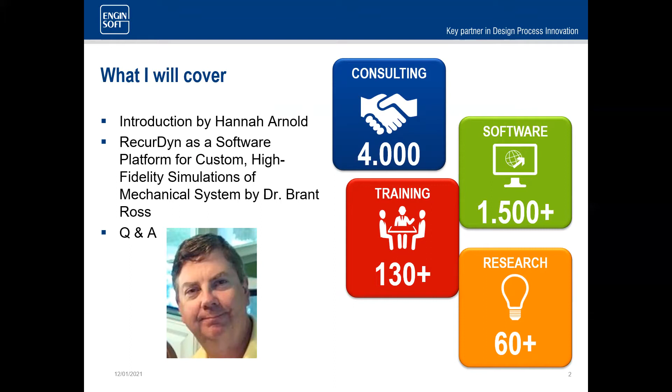So today we're going to go through our introduction, and then we'll turn it over to Dr. Ross to discuss RecurDyn as a software platform for custom high-fidelity simulations of mechanical systems. Feel free to ask questions throughout the presentation, but we'll have a Q&A at the end for dedicated discussions.

So a little bit about EnginSoft USA. We're a multinational company founded in 1983 by a group of engineers passionate in powerful advanced CAE technologies. Today EnginSoft is formed of a group of over 350 experts in new technology and leaders in virtual prototyping and optimization. EnginSoft provides customized solutions and leading innovative technology to support clients in complex innovations.

There are 7 locations around here. We also need to add our location out in Utah. We have Sweden, England, Germany, Turkey, France, home office in Italy, as well as our 2 locations here in the US.

Some of our customers by vertical are automotive, aerospace and defense, energy and construction, industrial, appliances, retail and consumer, as well as metallurgy.

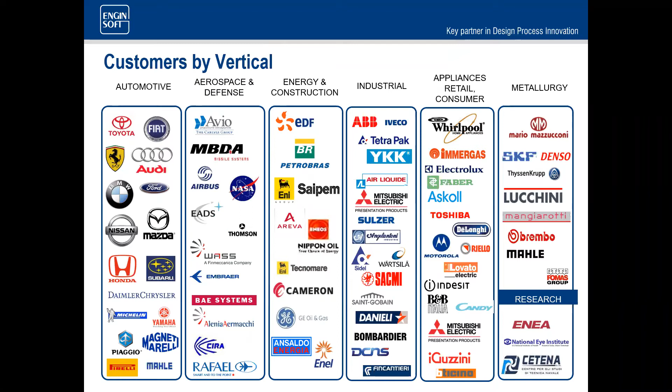Some of our distinguishing characteristics: we've performed over 4,000 consulting projects with various different companies and entities. We have over 1,500 different users on the software platforms that we provide and support. We typically do over 130 different training sessions yearly. We have changed how we do some of those due to the COVID situation, a lot of them moving from actual events over to web-based platforms. We've also performed over 60 different research projects with academia and government entities.

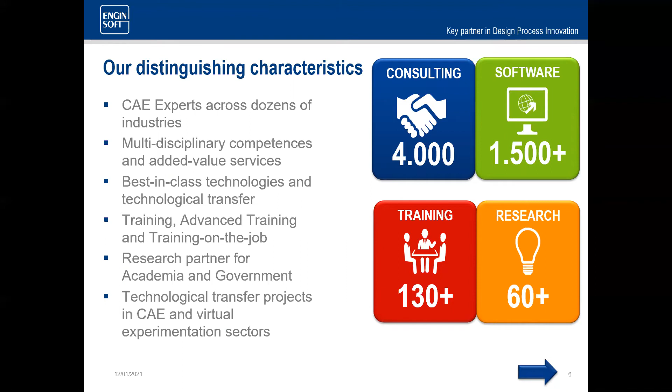And some of our skills are fluid dynamics, fatigue and durability, crash and fast dynamics, process simulation, high performance computing, mechanics, tolerance analysis, environmental and vibroacoustics, multi-body, and optimization.

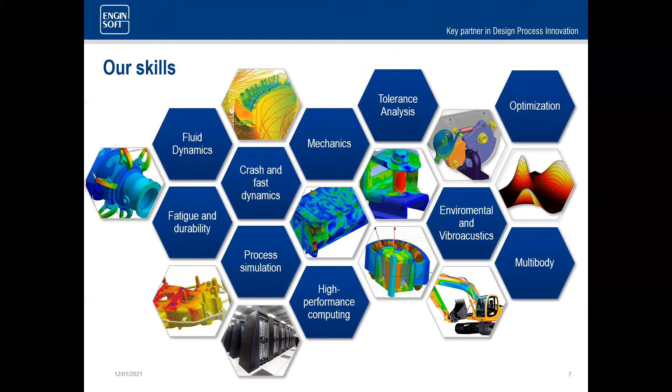So today we're going to talk about this topic of high fidelity simulations of mechanical systems, and especially we're going to talk about how we are able to accomplish these high fidelity simulations, and how we make them available to the non-expert user. This is really a special topic, and as far as the case study we have, this sort of work is, I think, rarely shared, because people who do the work to come up with a special simulation system tend to keep it private, as there tends to be proprietary information, and it also becomes a very strategic tool. But in this case, we have some work that we did under a government research grant, so we have this very rare opportunity to be able to share some of the details of that with you.

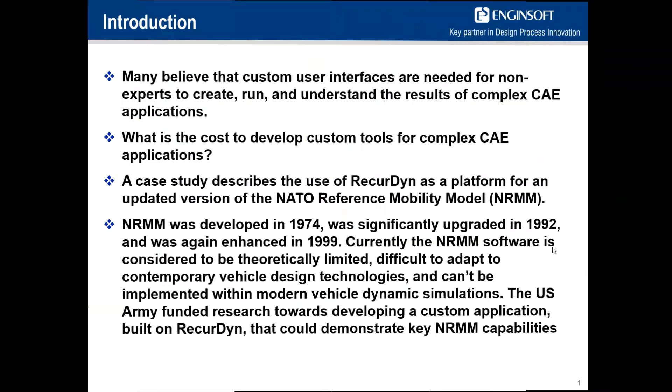So by way of introduction, let's talk about what the problem is we're trying to address. As you know, many people believe it can be very important to have custom user interfaces to enable non-experts to create, run, and be able to review and comprehend the results of complex CAE applications.

I think these days, some organizations have dedicated CAE analysts whose full-time job is to do CAE runs, but many other organizations rely a lot upon project engineers and product engineers to do the simulations as part of the overall design process. In those cases, the engineers are definitely experts on their products, but aren't really full-time focused on simulation. So to have custom tools that really address the particular process that needs to be done can be very important.

Likewise, this ability to put into the process some process automation, so that for the typical simulations that are run in the organization, the tedious part of it can be automated out to be very fast, provides a more efficient environment and a better user experience.

This diagram shows the basic architecture that we developed. On the left with the RecurDyn block, there are various aspects to the software that we have to worry about, including issues of being able to do the proper calculations, the proper simulation, and be able to obtain high fidelity results.

That's one part of it, just the computational aspects. The other part is the graphical user interface aspect — how do we have a logical process that the user can follow without being bogged down with a bunch of manual steps.

As far as interfaces are concerned, one aspect of a tool like RecurDyn is that there are many interfaces already in place because it's built to be a multi-physics tool. So as we look at some of these existing interfaces, we can evaluate how they compare as far as needed capabilities, but also how they compare with custom modules needed by the NRMM.

One is flexible bodies, which can be represented as linear mode shapes or as a nonlinear flexible body, used to model different aspects of the vehicle system. NRMM was not doing that before, so that's a new enhanced capability, and it can be done within the standard RecurDyn tool set.

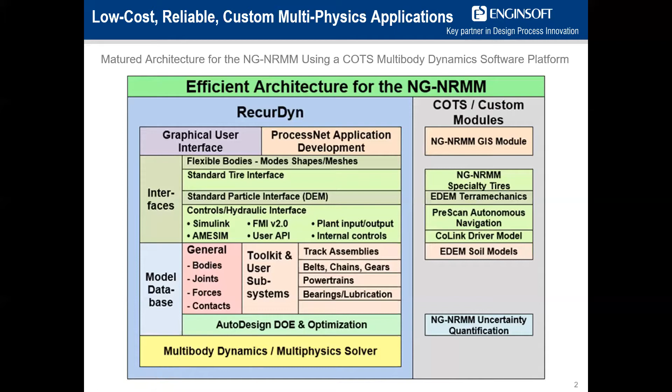The first benefit is that the enhancement and maintenance of the RecurDyn software itself is co-funded by a broad community of users from many different industries. That's important, because a tool like NRMM would be used by maybe a dozen agencies and a similar number of governmental contractors. If everything is done from scratch, a small group has to fund everything, and that becomes difficult to sustain over time. In fact, that's one reason why the NRMM software fell behind—there wasn't enough money to keep up with everything happening in mechanical computer-aided engineering software.

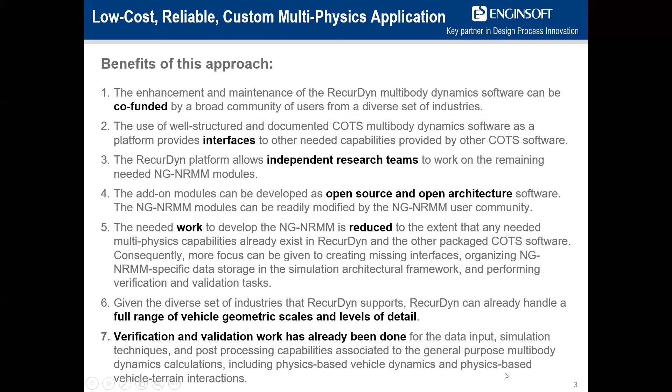Okay, so with that introduction, let's look at what the challenge is on NRMM. This tool is to look at off-road capabilities of vehicles, whether they're wheeled vehicles or tracked vehicles. The idea is if there's some sort of conflict and you have multiple NATO countries working together, you want to know the mobility capabilities of the different vehicles, because if a vehicle is not able to traverse the ground, it may end up blocking the road or path so other vehicles can't come through. Nobody wants that kind of a problem.

So in this case we're looking at interfacing. The first goal here is to be able to look at interacting with geographical information systems, or GIS systems. That's something most RecurDyn users are not too worried about, but in this case it's a very important capability. This particular plot of ground is located in Michigan, upper Michigan, in a remote area, and is basically a test course for a variety of off-road vehicles.

So how is information about a terrain communicated, and how does the terrain even get described? It turns out there's a variety of techniques, different sensors, including radar sensors, that can be used to evaluate the shape of the terrain. There's also information about the terrain characteristics, which we'll get into more later. In this case we have this piece of ground, a 1 mile by half mile rectangle, and we have information about it.

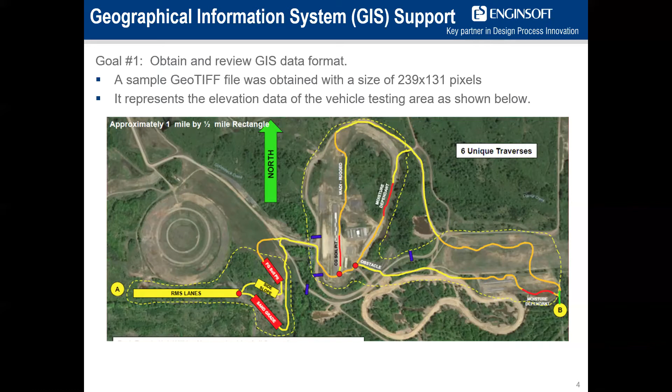So the question is, how do we bring it into RecurDyn? The approach here is to use ProcessNet, and the file format we're working with is called GeoTIFF. These GeoTIFF files contain the elevation data, and the point of the ProcessNet application is to read in the file and create a three-dimensional terrain surface, or as referred to in the track assembly modules, a road. Likewise with the tire modeling, we have the concept of the same terrain or road that the tire or track interacts with.

So the application was developed. Since ProcessNet is running in Microsoft Visual Studio, it can access many languages, tools, and development resources that work with Visual Studio, which are then ready to use to enhance RecurDyn. With our research, and I should give a shout out, Nelson Wu did much of this work for this project, and especially did all of the ProcessNet work, and he's super skilled at that. He went and found an open source library called Geospatial Data Abstraction Library, and found that there were different language bindings available. Visual Studio supports C#, and there was a C# binding, which helped make it more straightforward to use that library.

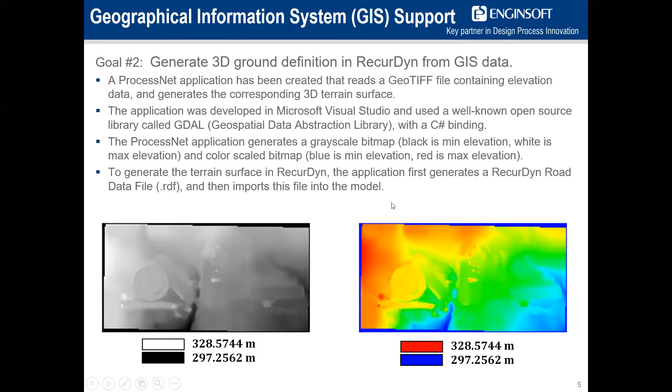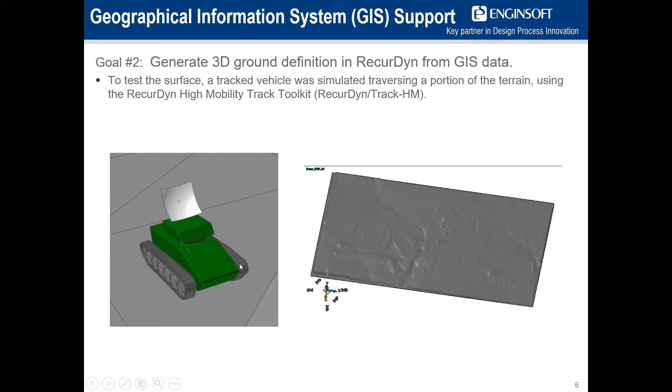So the first goal then was to read in the file. Second goal is to generate the 3D ground definition, and this shows the output. If you look at this image on the right, you can see different changes in elevation that map up or correspond with the color bitmap images we saw earlier. But this is actually polygon-based terrain, and the vehicle, in this case a generic tracked vehicle, can actually operate on this very complex terrain.

So next slide, we're going to look at what that is like. So here's our tracked vehicle, and here's this very large terrain. Actually, this tracked vehicle is more like an autonomous tracked vehicle, not a full-sized military vehicle. It's a smaller tracked vehicle for reconnaissance and so forth. But anyway, you can see all the details of the terrain.

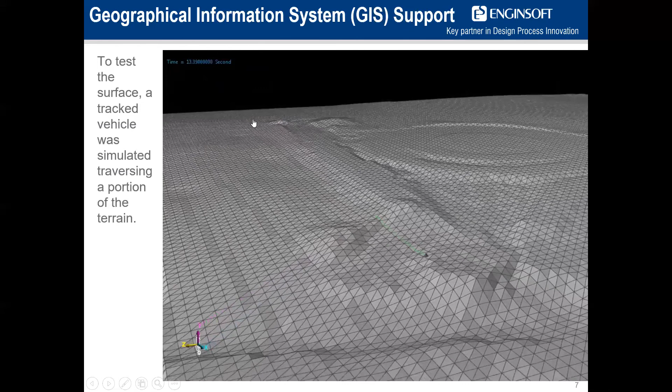So basically the user is able to now just import this GeoTIFF file and have this terrain generated. So now the user doesn't have to get into all the details of the GeoTIFF file. By using the ProcessNet application, he can use this data and get it very quickly. And this is really advanced capability, to be able to have this level of detail.

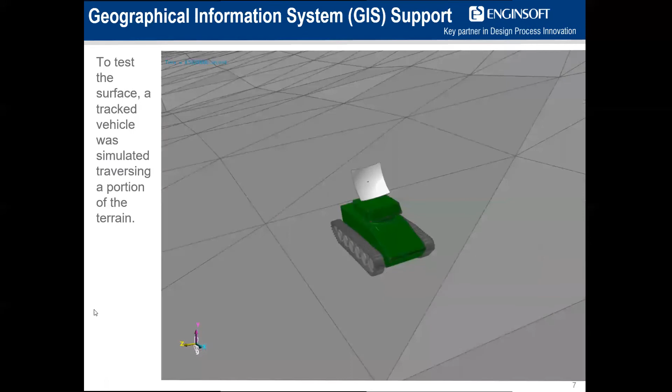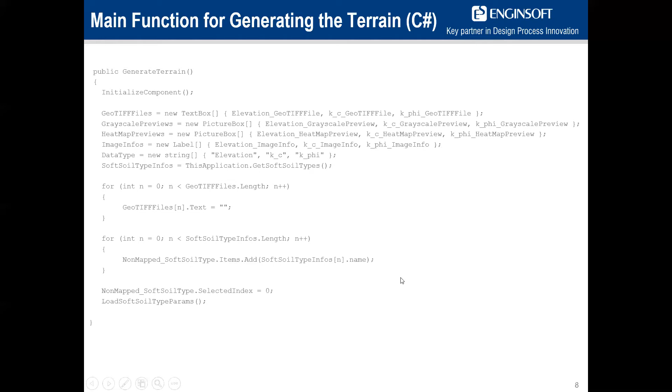This is just showing a few lines of code, but just to see all these different function calls. It's just C#, but it can be any .NET language used with Microsoft Visual Studio. So it's just regular coding that's used, but the user is just working with the library file to be able to run the application.

Okay, so goal 3 was to look at mapping of soil characteristics. It's not exactly prevalent today, but the hope is that as time goes on, there will be information from the GIS system not just about the terrain shape, but also about different aspects of the terrain and soil. Things like how much moisture is in the soil, what kind of vegetation might be on the terrain, and various attributes like that, or obstacles - like sizable boulders - something you would not want to drive over. All that information is desired to have as part of the file.

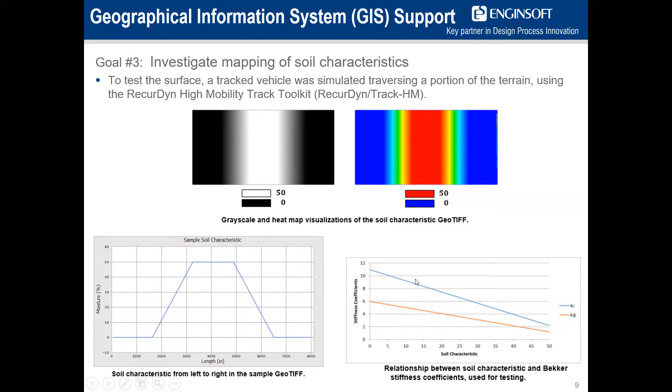So then what would we expect to happen? In this case we have the vehicle traversing, and now it's starting to go through. You can see that with the less cohesive and less stiff soil, this heavy vehicle sinks down into the soil because of the lack of stiffness and cohesion. Here's the biggest sinkage, and as the soil gets stiffer on the other side, it kind of climbs back out.

Okay, so the idea would be to have this terrain with the soil characteristics. What we have working here is communication between the terrain and properties of the track interaction with the soil, so that we're getting this interactive changing of characteristics. This is, I think, very advanced capability. Usually it's not so common to be changing basic model characteristics during a simulation, but with this approach we're enabling that, so that the soil characteristics being seen by the track is totally defined with the terrain.

So that provides a lot of capability.

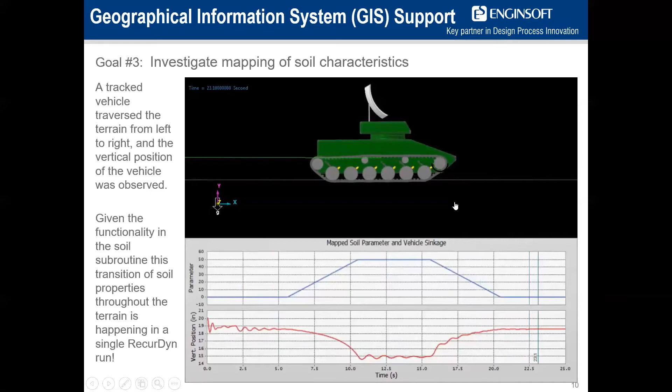As I mentioned, there are other attributes besides soil attributes, things like trees and rocks and so forth. As we've talked about before, the elevation data creates the surface, but there can be other data to represent the trees, some information there. So the idea is that in ProcessNet, there was an algorithm put in there to look at this variable related to

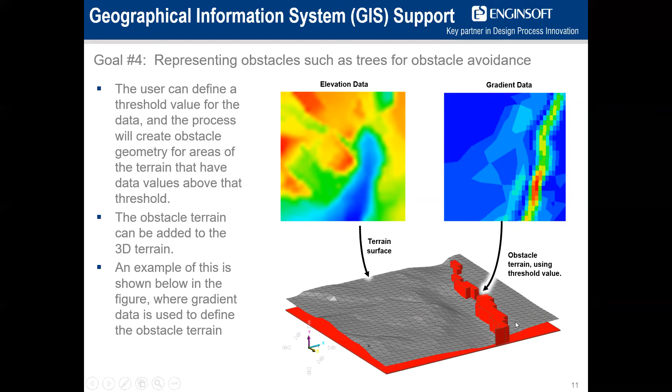presence of vegetation and tall vegetation. We had a certain threshold value, and we decided when trees were above a certain threshold. Small trees can be pushed aside by the vehicle, but large trees cannot. So if the trees were larger than a certain value, we set up obstacles. And where there were obstacles, we actually updated the terrain to create some terrain features, to make those obstacles apparent.

So for all the different things we've been looking at, we need a user interface to support that. In this case, we're looking at the user interface that was developed, again, using ProcessNet.

This is where the bitmap images are being produced, but it's also producing information about the terrain. This is showing the min and max elevation in meters, and it has soil parameters available on the right. This is a library of soil parameters from RecurDyn, but we also add the ability to override those soil parameters with information from the terrain.

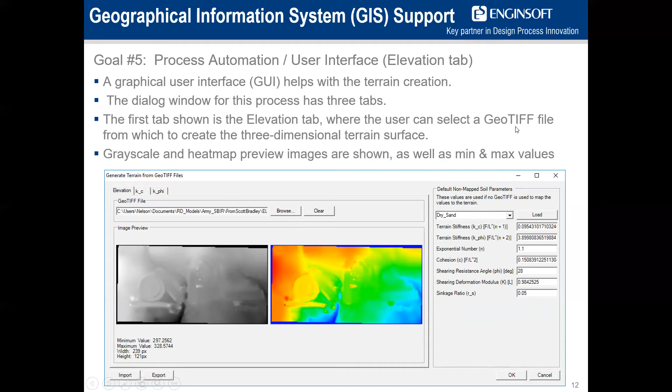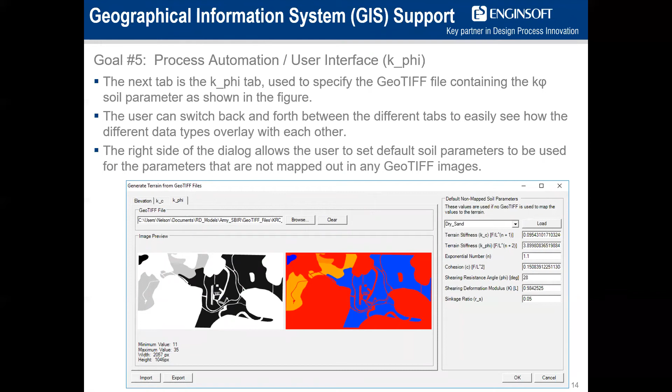Now we're going to look at autonomous vehicles. We see the blue showing a target path for the vehicle, and the red showing the actual path that it's taking. The blue path is the target path because it was done with specialty software called PreScan that's used for the obstacle avoidance.

What we did is we also put together a capability to do it directly in RecurDyn. These white lines coming out from the center of the vehicle represent sensors, and that sensor data is used to guide the vehicle. On the top view, we're looking from the top,

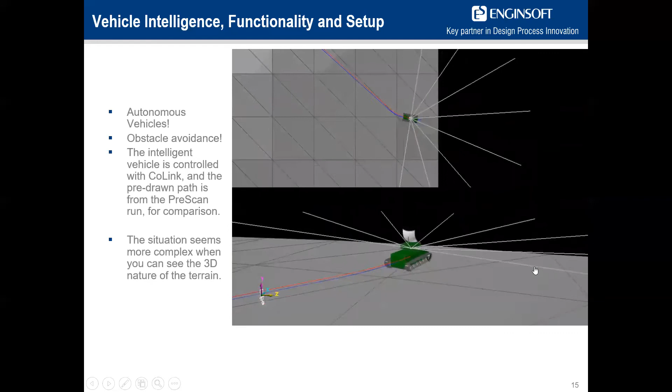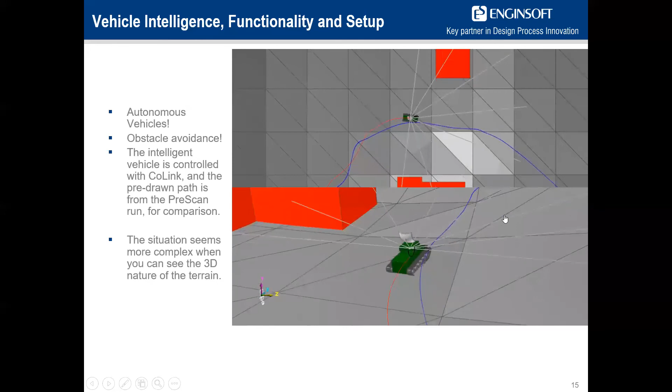and on the bottom we have this ISO view, and you can get a feel for the fact that this terrain is not level. We can also see the vehicle doing a little bit of sliding on some of these corners. That's the value of this kind of high fidelity simulation: you can see what the accurate behavior is, without it being idealistic, like not sliding at all. In real life, they're sliding. There's also delays because of the controls and so forth, and all that can be considered here. This is showing one of the control systems that was developed.

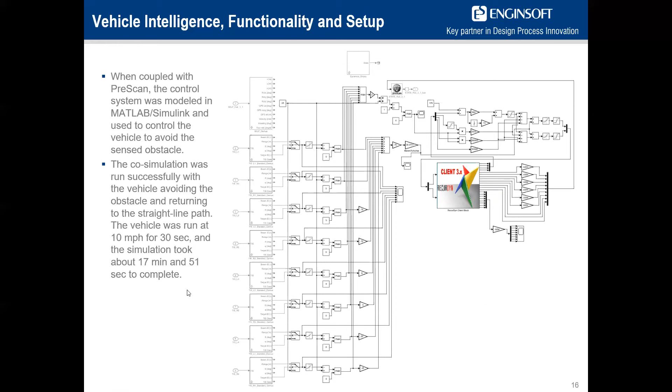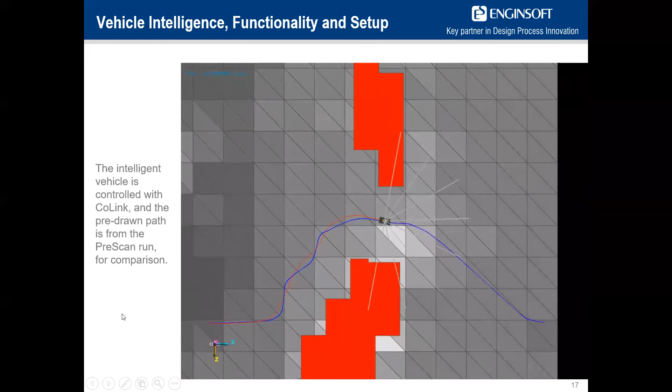So there were 3 different runs that were done. One was with RecurDyn and the PreScan software, again using MATLAB as the intermediate software. That's just part of the interfaces of RecurDyn, being able to use FMI, being able to use MATLAB, being able to use a library with a programming interface and so forth. All these different things can allow interaction with other tools. PreScan is a very specialty tool that has a lot of intelligence for avoiding obstacles. Anyway, so that was one simulation.

Second simulation was done with CoLink being the controls package, RecurDyn CoLink, as opposed to MATLAB, and then the sensors and all that logic that was happening in PreScan was also added to CoLink, so that everything was modeled within RecurDyn and RecurDyn CoLink. Then the third one was just the vehicle, having a very basic controller to follow a pre-described path, not looking at any obstacles, no sensor logic.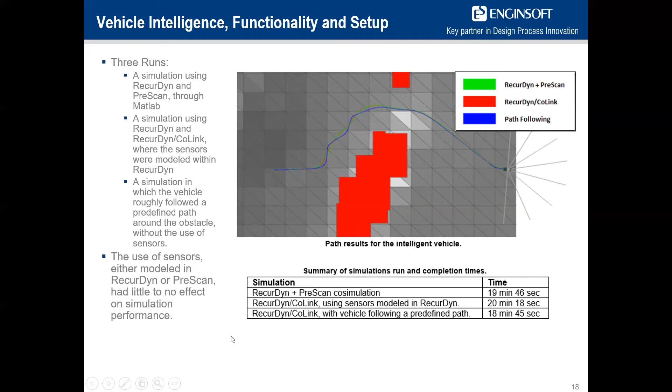Okay, another area for NRMM is physics-based vehicle dynamics. Here we're looking at an example of a wheeled vehicle. This is called the FEV vehicle, or FED, sorry. It's a fuel efficiency demonstrator, so it's doing some special things with hybrid technology and different things like that.

In this case, we're looking at a particular maneuver, which is just acceleration down the track at full throttle. On these different plots, we can see velocity in miles per hour, so it eventually gets up to about 85 miles an hour. Then the middle plot is showing us the gear changes, and this is, I think, 6-speed. Then on the bottom, we're looking at the engine torque as a function of time.

So the speed of the engine is going to be varying with the gear that it's in, and you can see that when it shifts to the next gear, the torque jumps up because the RPMs are slower and so forth. There's actually many different mobility events of interest, and this is just one of them. In this case, there's a user subroutine that's used to control the shifting of the transmission, and we'll cover more about that later. Over here on the right, we can see with the vehicle, we're using some force vectors to show torques and vertical forces at the wheel centers.

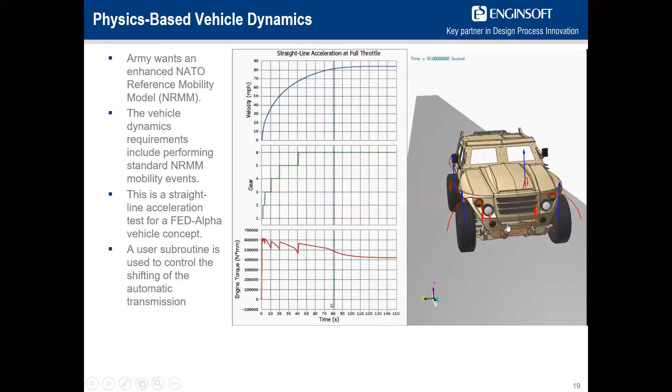This is showing some of the inputs that go into this wheeled vehicle. We have a detailed model of the steering assembly, and then the suspension, and then different tables of information. This is the air spring for the rear suspension, expressed as basically a lookup table. So we have different Y values, different X values, and then values in the cells are the Z value from the table. We can be varying two different aspects of the suspension behavior, and then be able to extract the proper damping force.

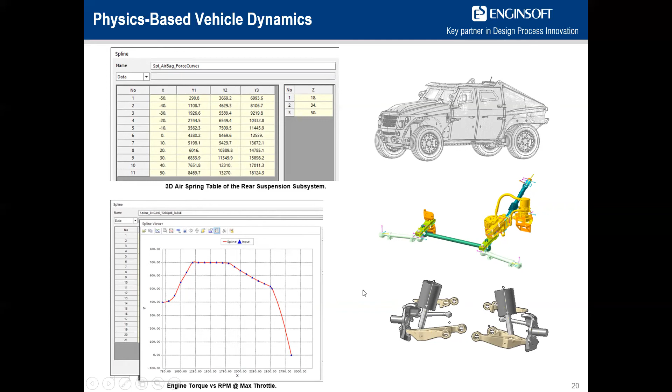And actually with the spline data, you can have it associated with an external file, so things automatically update by just swapping in a new file. The model itself doesn't have to be changed because it's going to update with the file name or with whatever the contents of the file are.

And this, in the bottom left, is the overall powertrain topology, logic topology. These are all the different interactions that are happening. You can see this interaction of looking at the engine RPM coming out of the PTO, and then applying the transmission gear ratio, and then finally you have an output shaft RPM.

And this lower right is a table showing what gear is going to be selected given speed and the torque requirements, and that will determine how things get shifted. All this information for the shifting is actually done in a user subroutine.

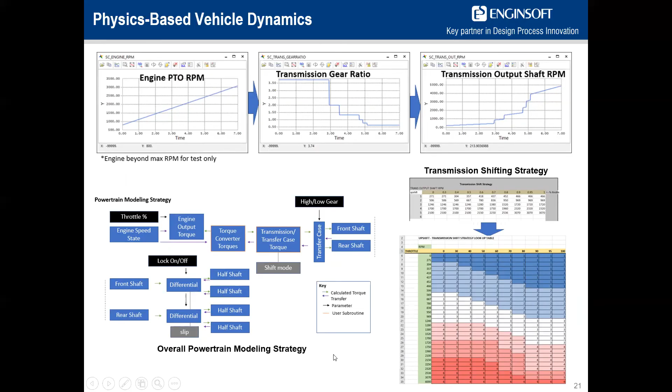And you can see in this overall strategy, according to the color of the arrows, we have certain things being conveyed as parameters. It could be calculated items, and it could be user subroutine calculated values.

So then, again, probably a dozen different mobility cases to look at, and here are two of them. One is a turning radius test. So if the vehicle's steering is turned hard to the right or left, what is the actual turning radius? This has to do with things like tire slip and so forth. You can see that the measured information versus the calculated information is very, very close.

Another mobility event is a NATO double lane change. The vehicle enters the test track, does a lane change to the left, and then comes back to the original lane on the right, doing so without hitting any of the cones. The question is, how fast can that be done?

So this dialog box on the right basically shows the inputs that can be provided. These selection boxes allow the user to pick the different tires and so forth, and up here you can see selecting the steering control joint and so forth. By selecting those bodies, the ProcessNet application will not only construct this terrain according to the basic dimensions of the vehicle, but it will also connect certain things to the vehicle so it can control the steering and so forth.

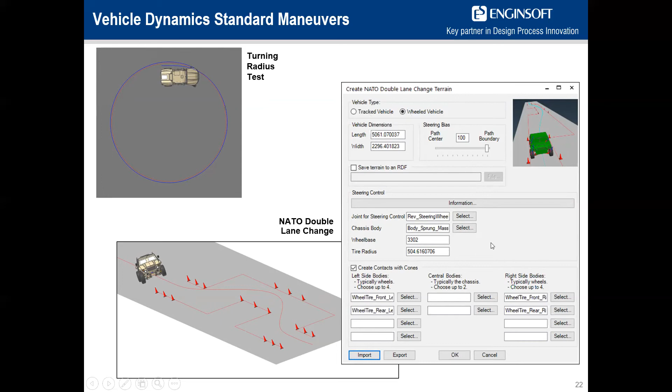And you can see that there's support for a wheeled vehicle or a tracked vehicle. So then we have a basic representation for a driver, and the driver has two things being controlled: one's the steering, and the other one is the throttle setting.

And then looking at the results, this is showing at 40 miles an hour, the vehicle is just almost touching the cone, here both on the left side as well as on the right side. So it's right at the boundary of hitting something.

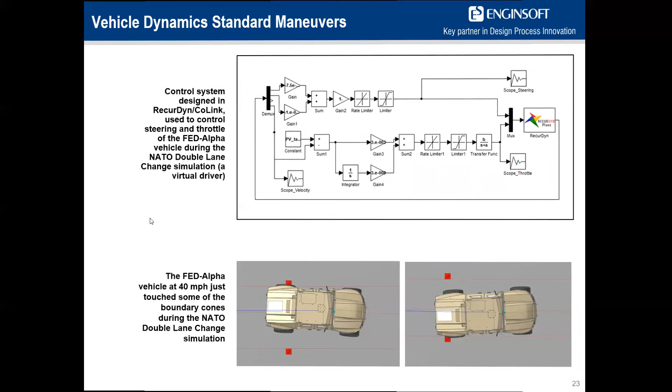So here we're going to look at the actual simulation. We have a head-on view, we have an overhead view, and then here we have a zoomed out view, a larger view looking at the vehicle and comparing two speeds.

So the blue curve is showing the vehicle at 40 miles an hour, which traverses the course almost touching but not touching. Whereas at the next increment of 42 miles an hour, the vehicle cannot maintain control and actually exits the course right there.

This image at the middle left is showing the vehicle in the middle of some of the steering, and you can see forces at the wheel center and torques, to provide some perspective. Of course, when the translational forces head towards zero, that means the tire is ready to lift off.

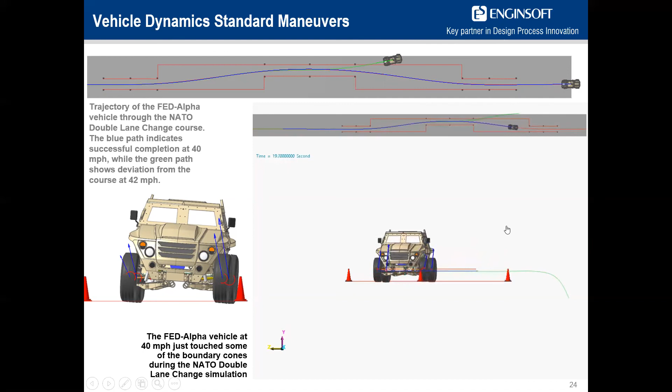So in some vehicles that can be a real issue. But you can see here it's getting a little bit of sliding, and that's why I was getting so close to the cone.

To do this kind of advanced simulation manually with a standard general purpose multi-body dynamics tool would take a long time to manually set up the track and all the different aspects. But with the process automation of ProcessNet and the custom dialog boxes, this is so much more approachable, and the user can go through these activities without worrying about the intricate details of every coordinate system for connecting things up, but rather can focus on the basic engineering questions according to the custom interface being presented.

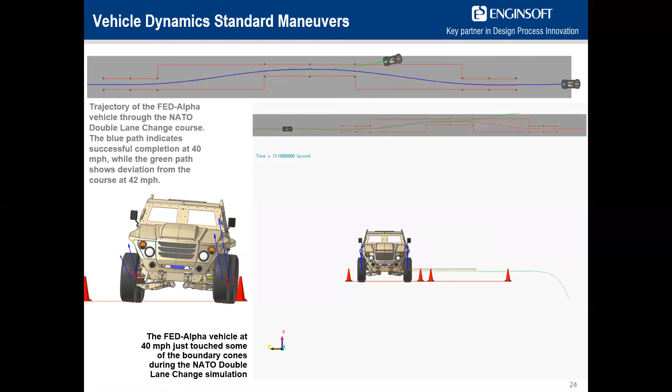With the lane change operation, we can also plot these different outputs, and we can have ProcessNet create these plots. In this case, we have lateral and vertical tire forces, at almost the limited speed of 40 miles an hour. We can see what's happening with the different forces as a function of different locations on the course.

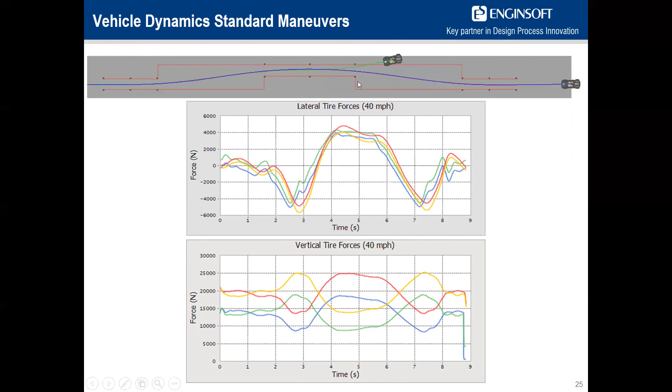Another area of interest was physics-based terramechanics. This is a huge topic, understanding what's happening with soft soils. It's very complex - the behavior of a soil varies with location, depending on the content of the soil. But even in the same location, the behavior of the soil can vary quite a bit with humidity, and maybe a bit with temperature and so forth.

So what we did on this project is we used the Altair EDEM software, and we created in RecurDyn a small model with just a few track links. The idea of the first and last track link is that they're there to establish proper boundary conditions, but we're gathering data from the middle track link.

We're applying a normal force, and then we have this horizontal force representing the track tension. You can see it's quite balanced on the top image here. So basically we're applying a normal force, and the track surfaces are being pushed into the soil, represented by all these particles. There's 78,000 particles, each made up of 3 spheres, so there's over 230,000 spheres.

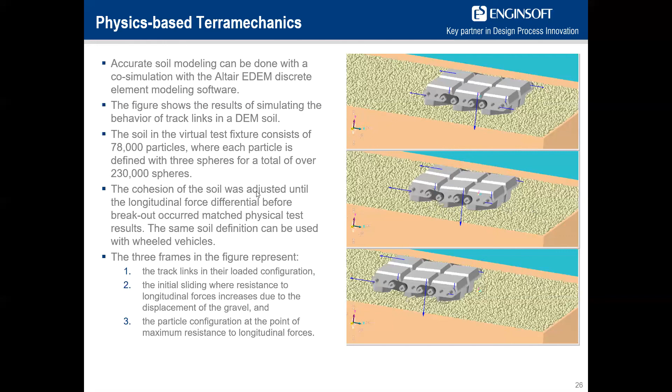Another area is uncertainty quantification, which means when we do a simulation, we can do it with nominal results, but then we want to be able to look at variability in the design inputs. So this is an important capability for our client.

For this project, there was a tool called Ramdo that was being used. There are other tools available. So within RecurDyn, because we have the auto design product, but we also have a design study capability.

We have the capability to import and export information. So on the import button on this design matrix, which is accessed with this button down here, you can create your own design matrix or have it created with one of the built-in techniques, but you can also import a CSV file, and that can come from any of the tools.

So if the client has whatever tool that's going to come up with certain runs, that can be imported in, and then when the user says simulate, all the runs will be done. And then this result sheet button will become active, and then you can export a CSV file that shows all the different design parameters, how they've been changed, and shows all the different results of interest and what those values were for every single run. And then that data can be used to do sensitivity studies, optimization, and so forth.

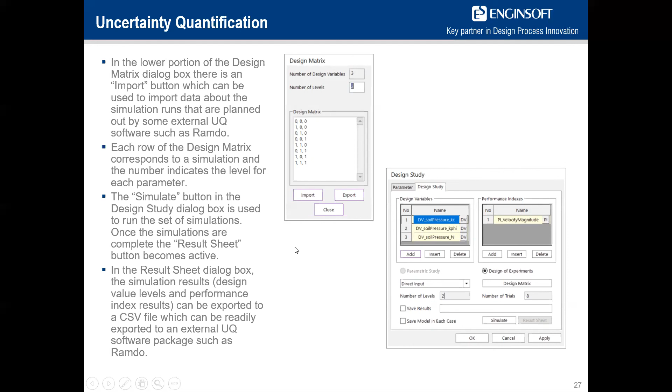So this is just another interface example. We've talked about many different things, but this is the nature of really having an effective multi-physics, high fidelity application for simulation - there are so many different aspects.

And as we've seen with RecurDyn, there were so many different ways to interface with RecurDyn - with subroutines, automation of the process with ProcessNet, formal interfaces to other tools and so forth. And that's what it took to be able to do all this efficiently.

And imagine if all that capability had to be developed from nothing, it would really take a tremendous amount of time, be a tremendous cost, and that's why this doesn't happen that often - a completely separate development project.

So again, what are the benefits? We talked about this in the beginning, but just to review what we've now seen is, with RecurDyn being co-funded by this broad community, the broad community has already driven the creation of so many interfaces in different ways, which made it well prepared to do this custom application.

And these interfaces are actually to other multi-physics type capabilities, which then really allows for some high fidelity simulation. And we've seen how with this project, we were acting as an independent research team, but we were free to develop specialty modules to cover the needed capabilities.